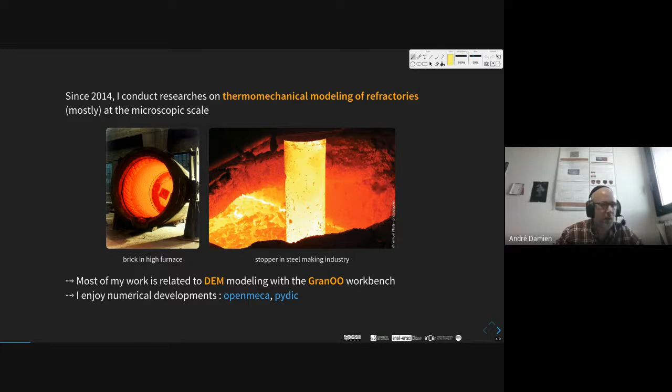So myself, I am inside this fourth axis. Since this date, I conduct mainly research on thermomechanical modeling of refractories. Here you have some nice pictures of refractories which are submitted to very high temperature. Most of my work is related to discrete element modeling with a software named GranOO.

And I also enjoy numerical developments such as OpenMeca and PyDIC. These are other software that I enjoy developing. Okay, so now let's move on.

I would like to introduce the discrete element method. I know there are some people who are very familiar with this method, but maybe not all of us, so I will very briefly introduce it.

The discrete element method was made for simulating granular media. Here you have some nice pictures of granular media such as rocks, but there is also cornflakes or other kinds of granular material, sand, and powder. As you can see, granular materials are everywhere and at every scale.

Okay, so now how do we consider this granular media? As you can see, in some cases granular media has the behavior of a solid, because we can walk on the sand, we can make nice sculptures with sand, but it also has the behavior of a liquid, because the sand can flow.

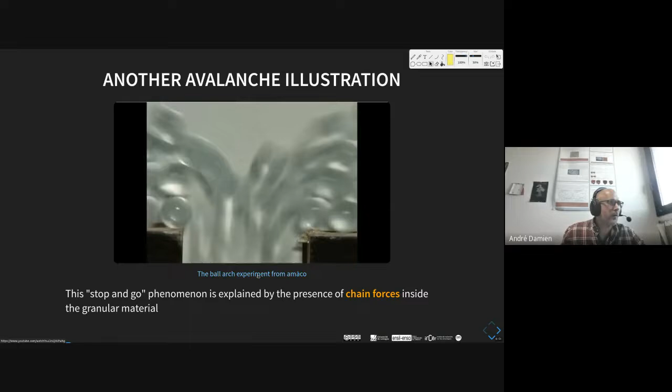Okay, so now this is the end of the experiment. I would like to show you a very nice video made by some colleagues of Duke University. This is a granular media, cylindrical. This is a disc, not balls.

And as you can see, this light is the chain force, which is revealed by photoelasticity. And here, this is a ball, which we can see. The ball, we will pull out,

and we will see a modification in the chain force. I think it's a very nice experiment. Here, as you can see, there is a modification in the chain force, and it's obvious to say that these chain forces are not continuous. This is not like pressure or stress.

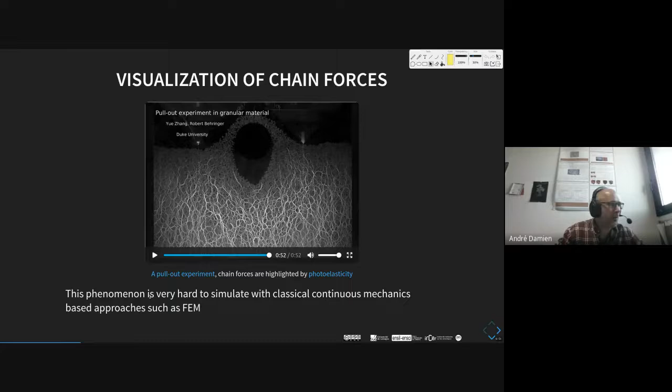So this phenomenon, this chain force, is very hard to simulate with classical continuous mechanics based approaches such as FEM. That's why the DEM was initiated at the beginning of the 80s in order to simulate the granular media. Here I think you get a citation of the main idea of DEM.

Cundall says, in this very important paper for the DEM community, that a granular medium is composed of distinct particles which displace independently from one another and interact only at contact points, and the discrete character of the medium results in a complex behavior under conditions of loading and unloading, and to date, no satisfactory constitutive relationships have been established.

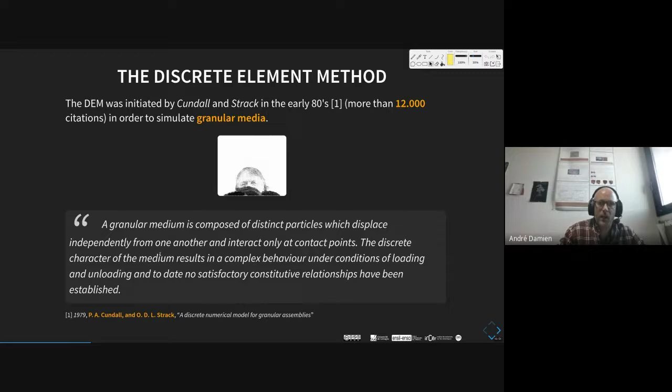So the main idea of DEM is to work, in fact, at the scale of the grain or the particle. Okay, so just a few words about how it works. So here you get some simulation of the DEM method.

So here you have some grains, and the grains are shaken inside a moving parallelepiped, and it allows us to create some waves inside this granular media. So the idea of the discrete element method is very simple. We consider that a discrete element is a rigid body, which we call a grain, and discrete elements are in interaction through simply contacts, and force displacement laws are introduced in this contact law.

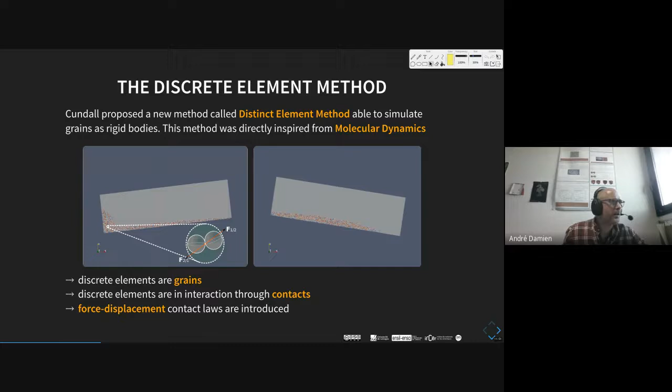And something very important: this method was directly inspired from molecular dynamics, in fact. So here you have the main algorithm of the discrete element method.

So at the beginning, this is an iterative method which needs very small time steps, and of course you get the initial state. So at the initial state, we consider the position of all the grains, the initial velocity, initial acceleration, and so on.

The first step is to collect all the forces and torques that act on the grains or discrete elements. After that, we apply Newton's second law to deduce, in fact, the acceleration from the forces and torques that act on the discrete element.

After this step, we have to integrate acceleration. So a first integration to deduce the velocity at the next step, and a second integration to deduce the position at the next step also.

And after that, we have to correct some displacement to apply, in fact, what we call the boundary conditions. For example, we want to have a rigid wall, so some grains have to be fixed, or we can apply a velocity, and some grains have to move in a given direction. This is what we call applied direction.

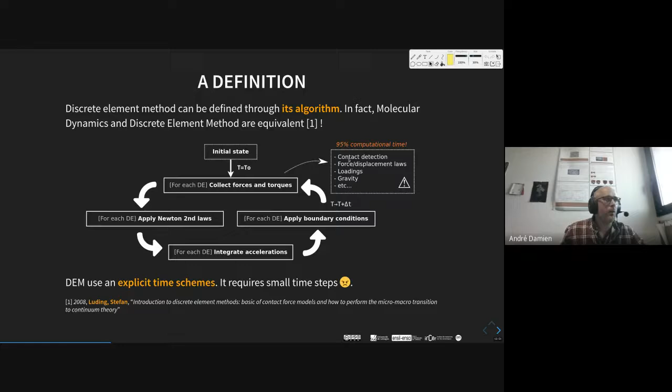So there is some trick to speed up this step, but at this time there is no satisfactory algorithm to get some increase in this contact detection algorithm. So now I would like to... here, this is a discrete element method to simulate granular media.

Now I would like to move on to another part, which is about using a discrete element method to simulate a quite continuum media, such as ceramics. The purpose of using discrete element method for ceramics is to model the failure of brittle media. Because as you know, using a finite element method to simulate fracture propagation and initiation inside a brittle media is not so obvious. So we can use the discrete element method to try to simulate this quite complex phenomena.

Here I have an example of an experiment called the wedge splitting test. You have a block of ceramics, a refractory, typical refractory, and the wedge is moving down to open up the sample and make a controlled fracture experiment. This is a method to measure the tenacity of ceramic material.

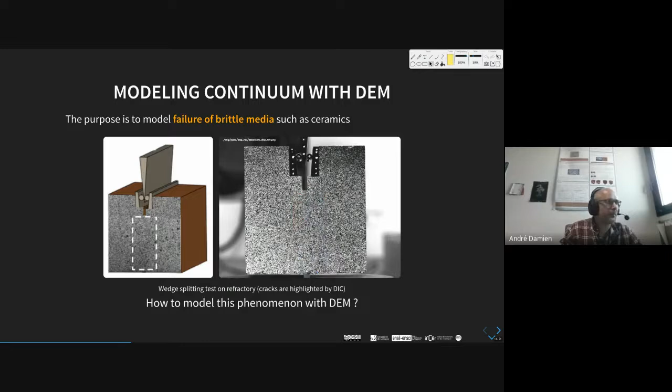So how to model this experiment with DEM? The idea is quite simple. It comes from the lattice element model, called LEM, which is a very old idea. We can combine LEM and DEM through the so-called bonded particle method. The idea is quite simple: we have material points which are surrounded by spheres. These are the discrete elements, which are mainly spherical, but we can use other geometry, as we will see.

These material points are linked through a very simple rheological mechanical model, and all these material points form a lattice network, as you can see on this picture. Here is the real experiment, and here is the model, the discrete element model, where you can see discrete elements linked by what we call bonds, which are rheological mechanical interactions between discrete elements. With this kind of trick, we can simulate a kind of continuous material with only a discrete description.

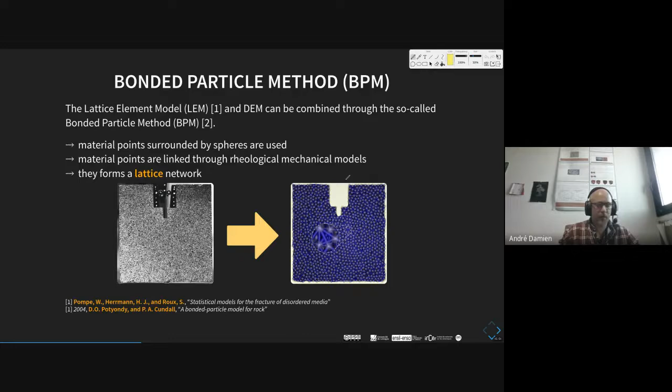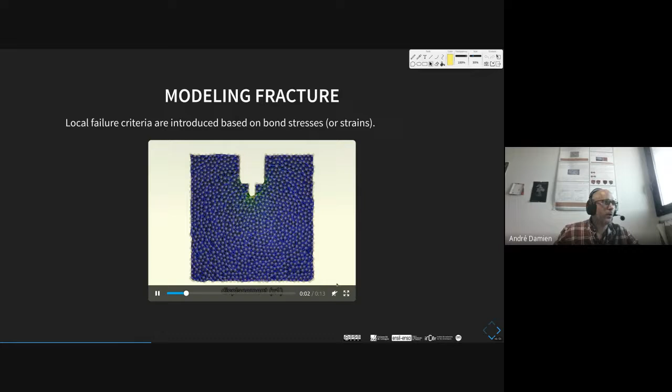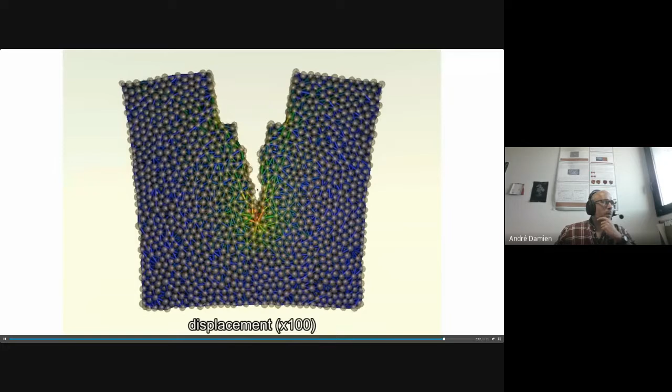The main interest is to introduce local fracture criteria inside this bond, and that is what we do in this video. Here you can see the propagation of fracture, and here the displacements are magnified. As you can see, we can obtain the initiation and propagation of fracture. These failure criteria are quite simple, generally based on local stresses, or less generally on strains.

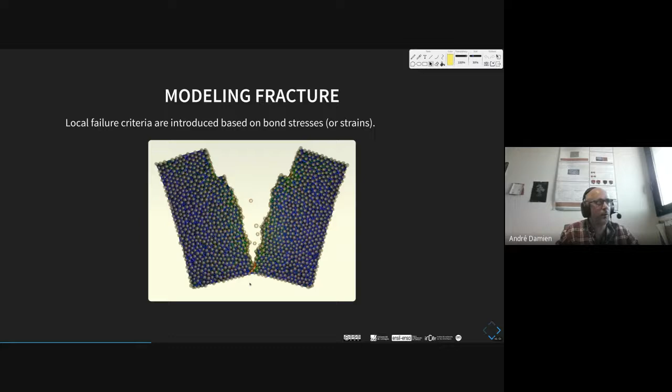But the main problem with this approach is what we have to put inside the local properties. The local properties for me are the properties of the discrete element and the bond between the discrete elements. So there is a problem: the input parameters of a DEM model are set at the local scale. For example, you set the mechanical property of this bond, but this mechanical property is not known. We don't know what we have to put inside this bond, and this is the main problem with the standard discrete element method for granular media.

We don't know what to put inside the contact law to get the right value of this contact law. We have to make some inverse problems, involve a lot of experiments, observe the experimental result, try some local properties, and make a kind of iteration to converge towards the right solution. So it's not so comfortable for users. This problem, I think, is a very common problem with DEM and the lattice element method.

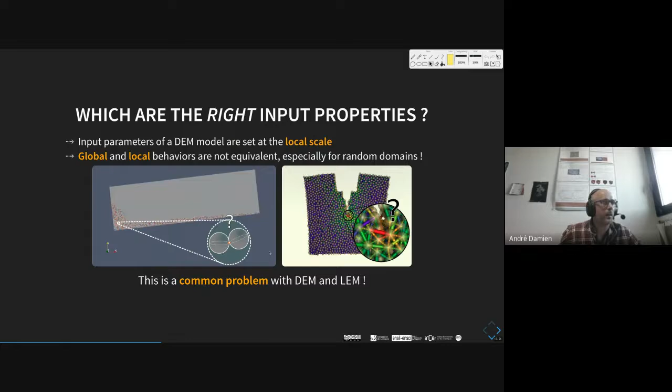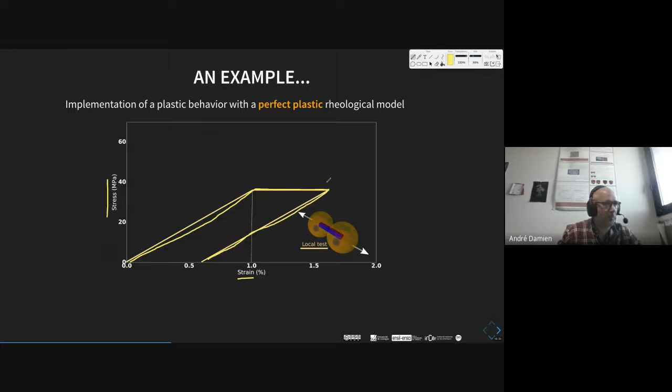So mainly discrete element users have to adjust their local properties to match given apparent properties of their numerical material. Okay, so I finish about this point.

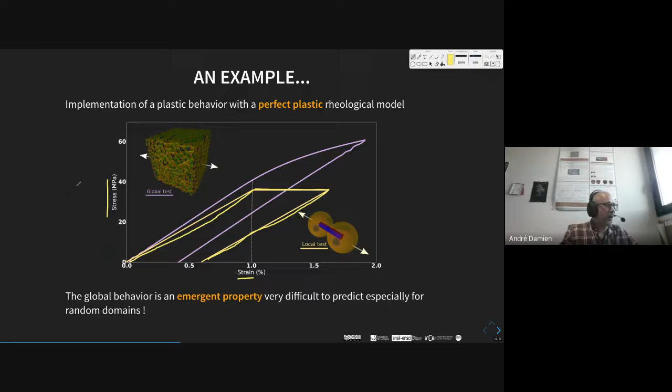Now we move on to the third part about the modeling of elastic behavior with what we call the distinct lattice spring model.

I will introduce this distinct lattice spring model. This model was proposed a while ago, and the idea is to have a direct model of brittle elastic media, defined only by three parameters: the Young's modulus, the Poisson's ratio, and a failure stress.

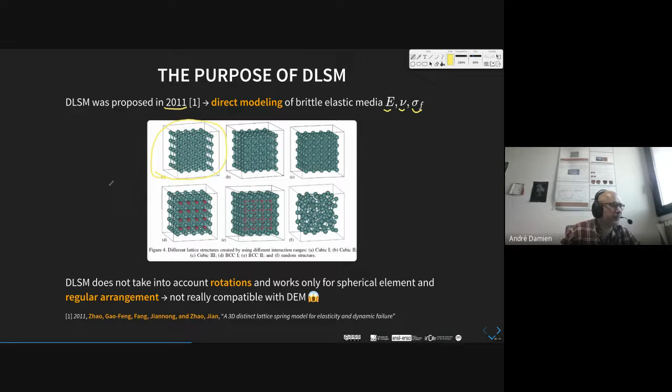So how does it work for the DLSM method? The first point is to apply a Voigt hypothesis, which is simply a hypothesis about the displacement fields. We consider that locally we have a linear displacement field, not quadratic - the simplest linear displacement field that we can describe mathematically.

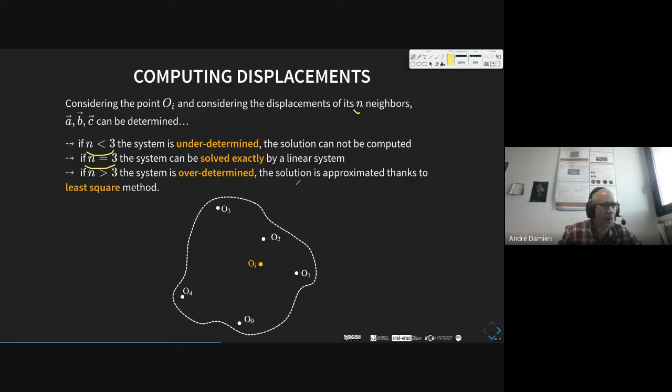We just apply the gradient on the displacement field. In most cases, with a discrete element method in 3D - not in 2D - the number of neighbors surrounding a central discrete element is more than 3. So all these unknowns A, B, C are approximated thanks to the moving least square method.

I insist on this term - it's 'moving' because we apply this method on all the discrete elements. So we have a kind of moving least square method over all the discrete domains.

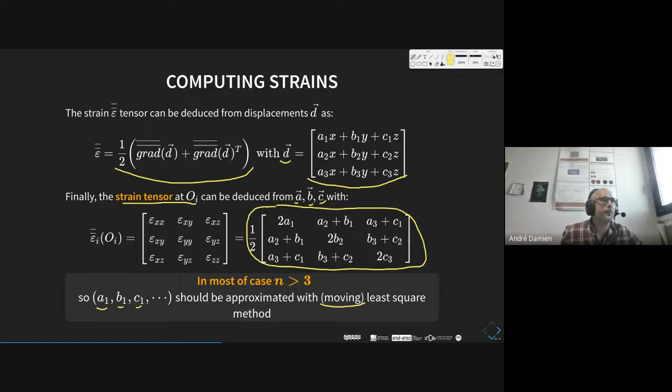Now we are able to compute the strains of a point cloud. Now we have to compute a reaction force to be compatible with the discrete element method, because inside the discrete element method, everything is forces and torques. There is no description of strain or stress. So how to do that?

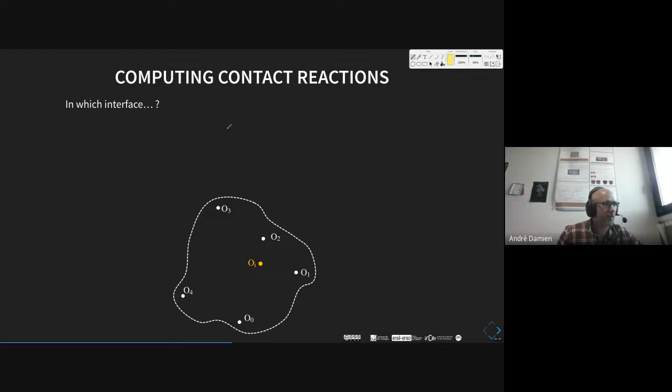The first thing is to make a kind of Voronoi tessellation inside our point cloud to get the surface interaction between two points. We can say that a Voronoi cell, in fact, is a discrete element. So we use a Voronoi tessellation.

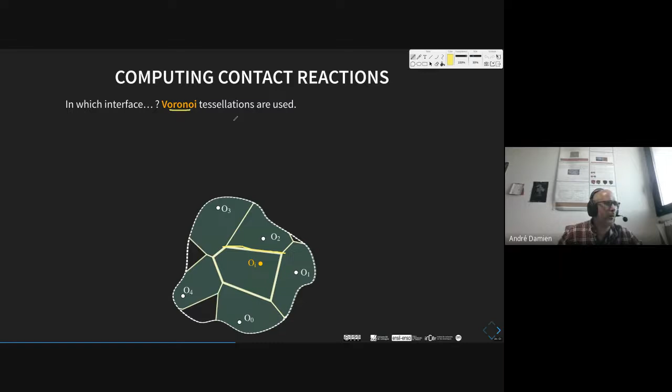Now, how to compute this stress tensor? It's quite simple - we just apply Hooke's law in 3D. As we are able to compute the strain tensor, it's quite obvious to compute the stress tensor, taking into account the Young's modulus and the Poisson's ratio of the material.

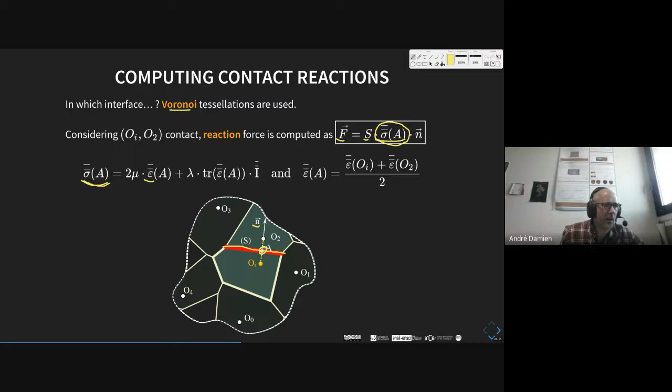A quite interesting and important trick: as we want to compute the force at the interface, we simply take the mean, the average value between the strains of the two neighbors to deduce the strain at the interface. I hope that's clear - sorry if it's not. So now we are able to have a stress tensor at the interface.

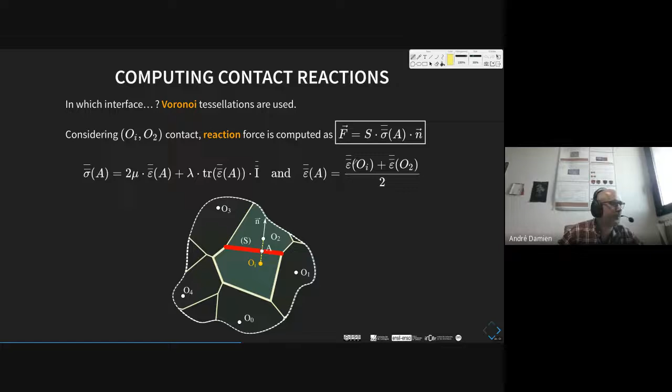So just a few words about how to build a discrete domain compatible with such an approach. So what we do in GranOO—there are, I think, a lot of things to manage this stuff.

We use what we call the compaction algorithm, named Cooker. This is a simple way to get a compact domain with spherical discrete elements. From this compacted domain, we apply a Voronoi tessellation thanks to the very simple and accurate Voro++ library. So now we are able to have Voronoi domains which are compatible with the DLSM method.

Okay, I would like to talk about some tests. We'll see how to introduce that. So to test the DLSM model...

I made this benchmark, which is simply an elastic ball, as you can see, rebounding and bouncing on an inclined plane. This very simple test is very challenging, in fact, because it involves high displacement of this ball, rigid body rotation, contact friction when there is a collision between the elastic ball and the perfect plane, and high deformations at the contact interface. So it's a very simple test, but quite challenging to obtain good qualitative results.

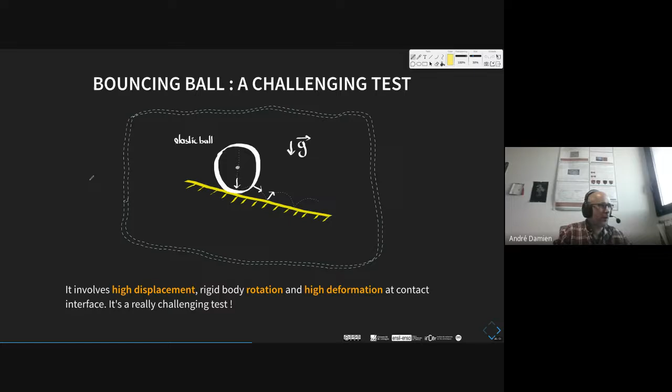So let's go see some video of this test. This is my first try, and as you can see, it's not very good. What we miss here—it doesn't work because the strains in this case are non-local.

What does that mean? It means it's important to compute the displacement field, the original displacement field, in the local frames of the discrete element. If we don't do that, of course, we are not able to manage high displacement and high rotation. So this is an important thing to do, and this feature was not present in the original DLSM method.

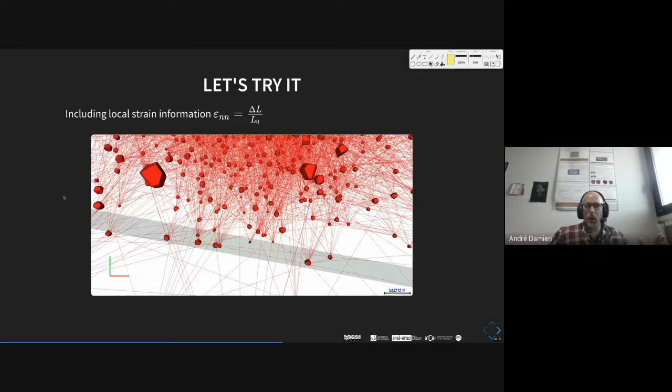So now we can have another try. And as you can see, it doesn't work as expected. So what we miss—in fact, the displacements are non-local.

Oh no, sorry. No, I made a mistake—I was too fast. No, the first thing is very important. In fact, here we compute the strain at the interface only by taking the mean between the two neighboring point clouds.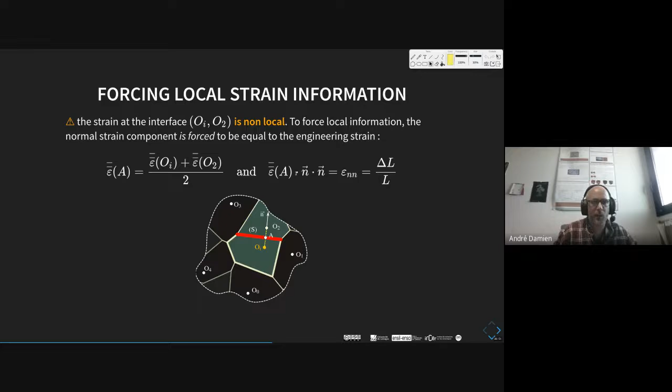And this is not really accurate, because in fact we can deduce directly from the displacement of these two points one component of this strain tensor. And if we force this component to equal this correct value, we are more accurate and more local, in fact. So that's what we do.

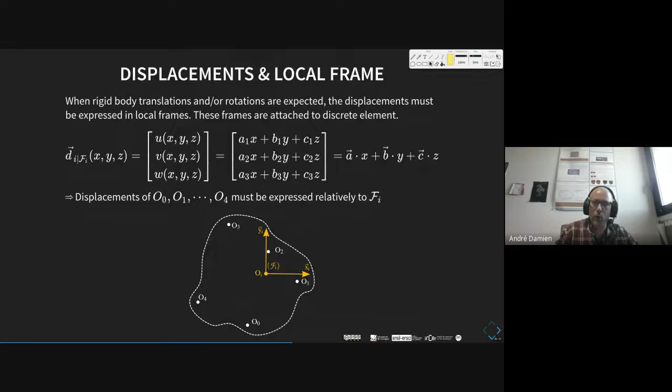Now the second thing is to use a local frame to have a local description of our displacement field. So this is the second trial. Now I move on to another try. It's quite better, but it still doesn't work.

So here's the explanation of this problem: with the original DLSM method, we have spheres, so with spheres there is no problem of rotation. But if we use polyhedra, which are Voronoi cells, it's a problem—we need to take into account this rotation.

So now we introduce the rotation capability in this method. Let's try again. So here again, it fails.

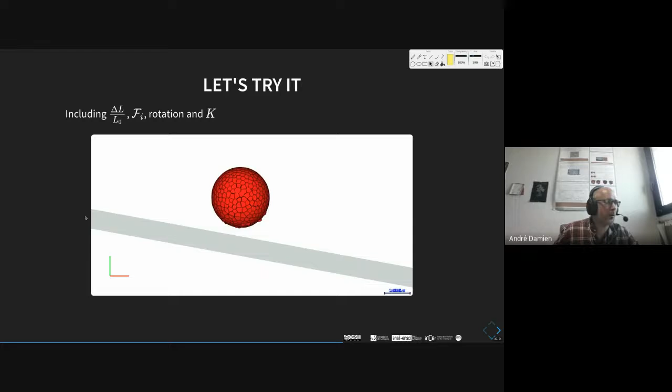So now another try. It started very good, but as you can see, there is again a problem. So we need, I think, a last ingredient, which is a small damping factor, because in fact this scheme is not strictly energy conservative.

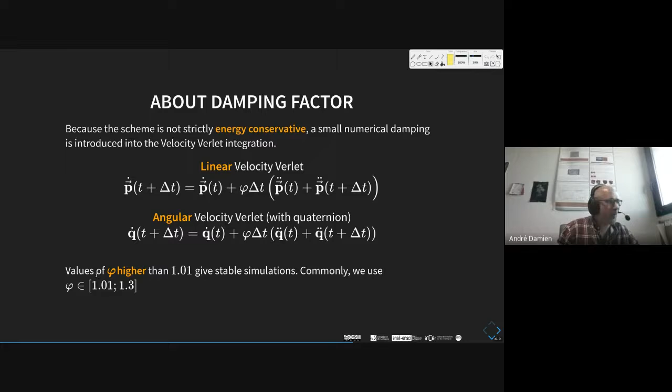I chose to introduce a small numerical damping factor in the velocity Verlet scheme. The initial velocity Verlet scheme is a centered integration scheme, so now this is a decentered integration scheme, and it introduces a very small numerical damping factor. It is now able to stabilize the simulation, as you can see here.

And here it works, I have to say.

I played the video just to the end. As you can see, it's a very simple test, but a very challenging one, because we need a lot of things to make this test work.

So just to conclude, to make it work, we need local deformation, local displacement, rotation and rotational rigidity, and a small damping factor. All these three features are quite new compared to the original DLSM method. I recall the main interest of this method is to introduce directly the material parameters of your simulation without making any calibration study.

So now I will talk about what I did during my stay at the CIMNE laboratory, which was to make a coupling between the GranOO software, where this method was implemented, and the Kratos multiphysics software. I will introduce that now.

This is an idea of Miguel Angel. He said if we are able to compute the local strain tensor, why not use the Kratos constitutive laws, which are able, in the finite element package, to compute stress. So let's try.

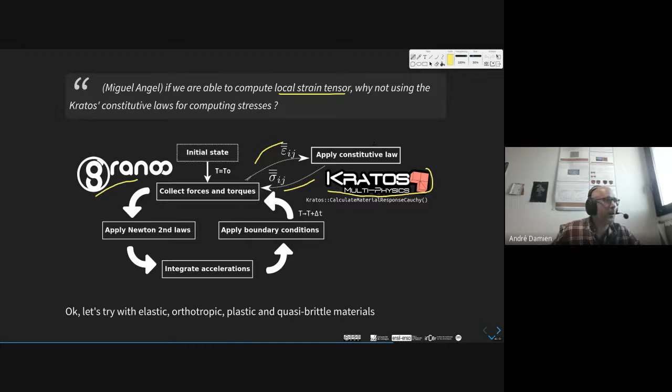Here you have the main discrete element algorithm, and here the dialogue between the Kratos package and the GranOO software. We simply send the strain tensor to Kratos multiphysics and apply these routines, the calculate material response Cauchy, and it gives a stress tensor. We treat the stress tensor inside the GranOO part to produce the right reaction force.

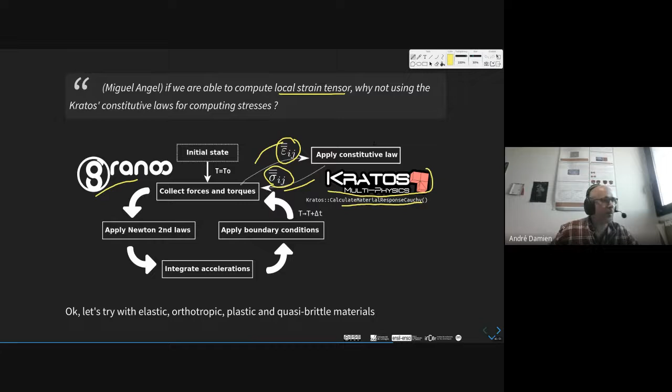And now I propose to show you some tests with this architecture - let's try with elastic, orthotropic, plastic, and quasi-brittle material.

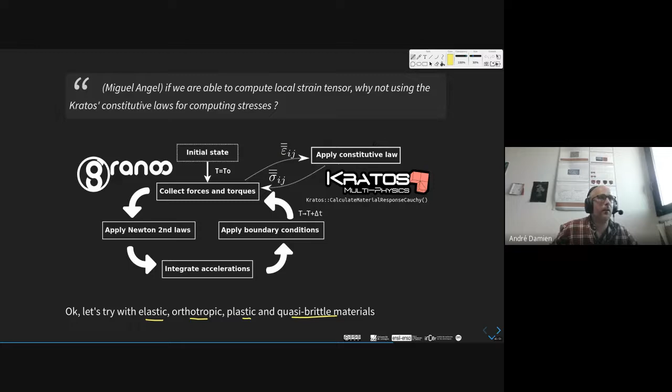The first test we do is a very simple uniaxial tensile test on what we call the gradiented mesh. Here you can see the mesh has a non-uniform distribution - it's smaller at the center of the sample. We would like to test this feature to know if this method is able to deal with different sizes of meshes, which is quite new to study.

Here, as input parameters, we put a Young's modulus of 5 gigapascal and a Poisson's ratio of 0.2, and we get at the apparent scale more or less the same value. So it's a very good result - I'm quite happy with it.

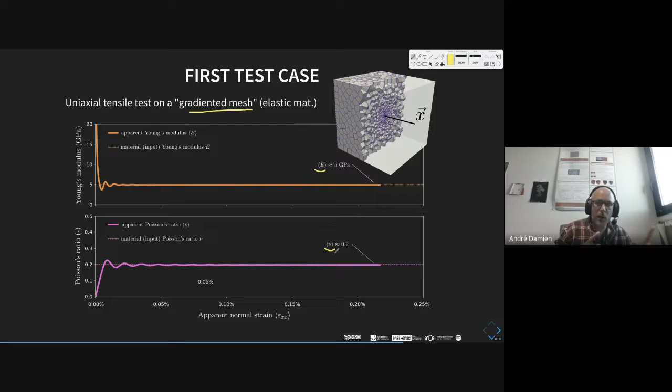So now the idea is to test something more complicated. Oh, sorry, I don't know why. Ah, okay.

This is a qualitative study. You have a plate with a central hole, and this is just a tensile test on this sample. As you can see, this is the stress - you get a stress concentration around the hole. Here is the analytical Kirsch solution, and here is our simulation. As you can see, it gives quite similar results, so it seems to be very accurate.

We get some main differences just near the hole, so maybe we are not very good just near the boundary condition, in fact the free boundary condition.

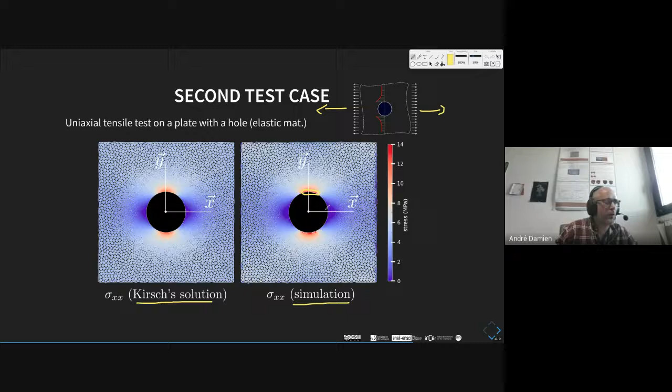Another test now is to test orthotropic elastic material. This is a very open problem with discrete element method - at this time, I don't see any satisfactory way to deal with orthotropic elastic material.

Here we simply use the generic anisotropic 3D laws of the Kratos package. As you can see, we put 5, 3, and 1 gigapascal for the Young's modulus on the x-axis, y-axis, and z-axis, and we get apparent values very close to what we put in as input parameters of our simulation. So it's a good result.

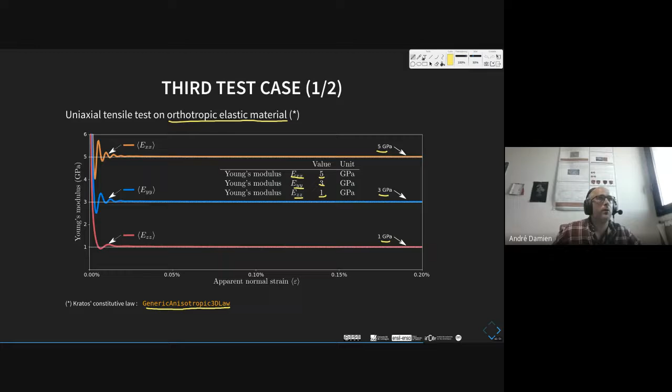We test the same thing with the Poisson's ratio. Here you have the input parameters of our simulation, and here you can see the apparent parameter. There is a small difference with the Poisson's ratio - to be honest, I don't know why at this stage. We have to maybe work on this topic.

As you can see, there's a small difference here, and of course this difference goes down when the value of the Poisson ratio goes down also. But proportionally, I think this is the same value. So it's not so bad with the Poisson ratio for orthotropic elastic material.

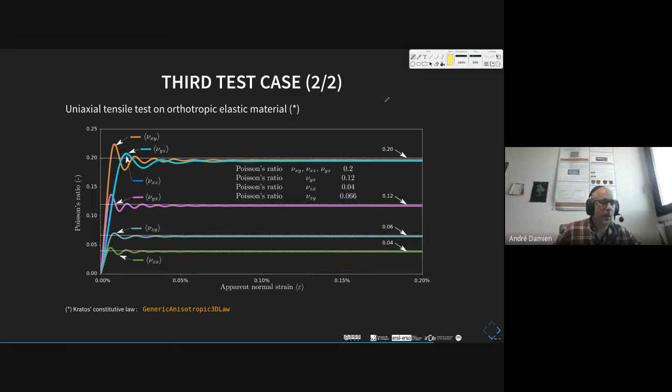Now, another test case is about plasticity. I'm not a specialist of plasticity, so I know that there are people who are very familiar with it. So I made a very simple test case.

So here we test this sample with 2,000 discrete elements, 5,000, 10,000, 15,000, and 20,000, just to test if the plasticity is sensitive to the mesh size. And as you can see, this is not the case.

So here we introduce a perfect plastic material with this Kratos constitutive law, and we get this apparent answer because this sample was simply submitted to tensile tests. So it's quite good results.

So again, here you get the input parameters. We introduce only yield strength, and we obtain this yield strength. So the results look good for me.

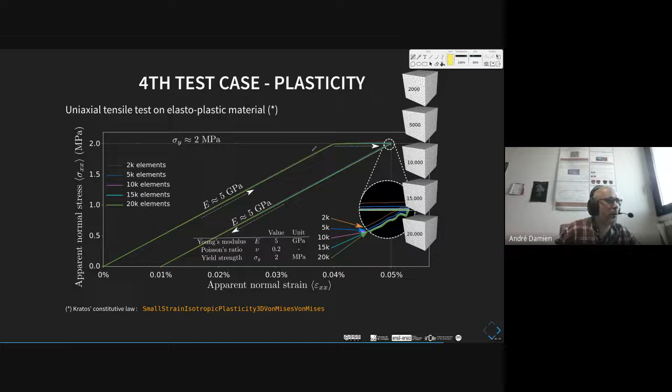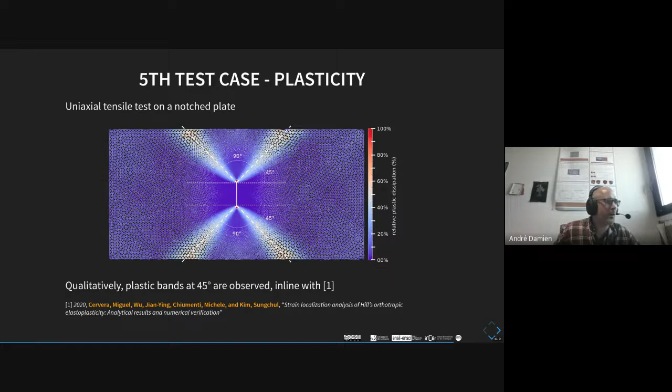Okay, so now just a qualitative test. So we do the same thing: we test the plasticity with a notched plate, and we get these plastic bands, which are oriented at 45 degrees. So it's quite in line with the theory.

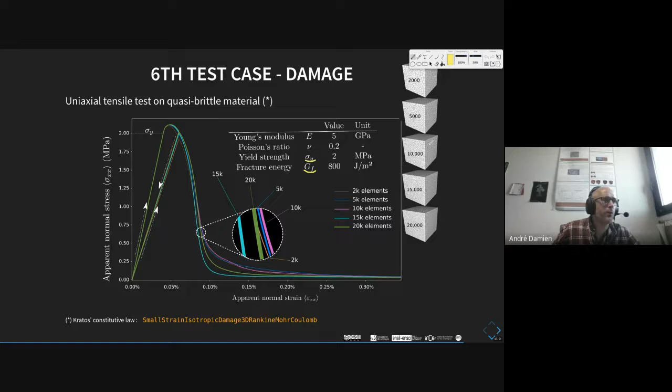And the last thing is about the quasi-brittle material. So we introduce damage modeling inside the material. We put a yield strength and a fracture energy, and we get an answer which is quite in line with what we would expect. Just the post-peak behavior is quite different. I don't know if it's significant or not, depending on the number of discrete elements inside our sample.

And we do one last test: a 3-point bending test, just to test if we get a crack path which goes to the right, toward this central point.

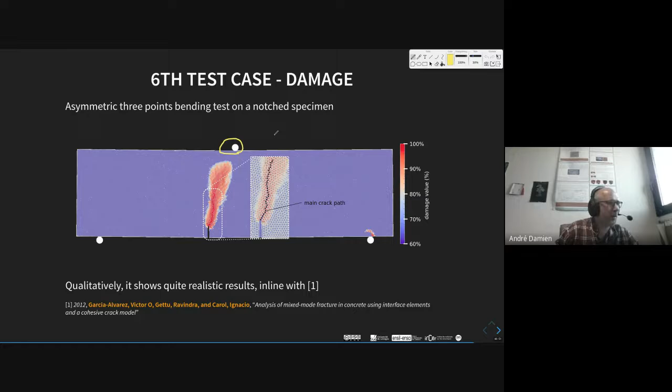Okay, so I think I have finished. So now the conclusion.

This study proposed an improved version of the DLSM model that takes into account rotation, proposes a numerical trick for stabilizing the numerical scheme, and the proposed model is able to deal with constitutive laws. We tested quasi-static and elastic material, plasticity, orthotropic material, and quasi-brittle material. It seems to support mesh refinement, and I think it's not very sensitive to mesh size, but now it's not so clear.

So I think now we have to try some more challenging tests with the coupling between Kratos and GranOO, and now I am ready for open questions. Thank you for your attention.

Thank you very much. Thank you very much, Andre. Very nice presentation. We have 5 minutes maybe or so for questions, if anybody is interested in asking.

Alejandro, yeah, go ahead, please. Hello, good morning. Congratulations for the good results. They're really good. I like them a lot.

Well, I'm one of the main developers of the constitutive laws that you've been using in Kratos, especially the orthotropic and plasticity damage ones. I remember Miguel Angel asked me at some point about this. Now I see the results. I'm happy to hear that they were useful.

Okay, it's not really a question, more like a comment. Do you have any complaints about the constitutive laws, or any feedback for me that might be useful to improve them? There's room for improvement, I just want a little bit of feedback, that's it.

To be honest, at the very beginning it was very hard to take in hand this new package, because I had no knowledge about how Kratos works. But now it's quite clear.

You mean maybe some bugs or something like that? Maybe you found some inconsistencies? If not, I'll be happy. No, sorry, I don't see anything strange for me. I made a lot of mistakes at the beginning, but that was my fault, in fact.

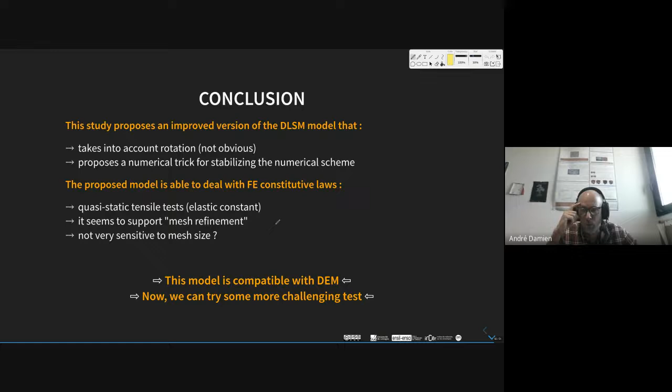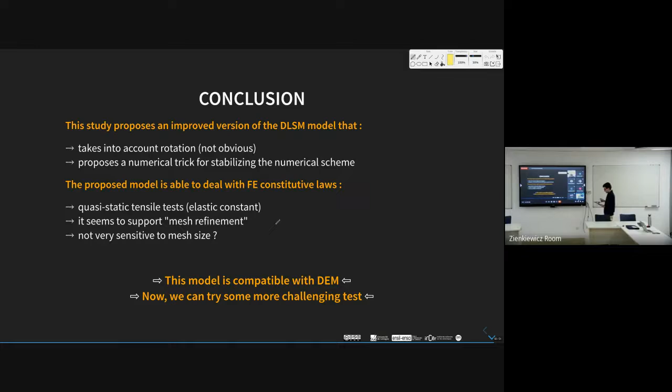Yeah, that should be fine, according to the size of the element, of the Voronoi element. That's a very good question and comment, Alejandro. I also had a question regarding this Voronoi size. I think the mesh dependency that may be seen in this example may be related to this internal length, this Voronoi size. Have you tried changing the Voronoi size to see if the mesh dependency vanishes or remains? How do you know which is the radius of interaction between one particle and the others, or the Voronoi size?

Yes, what is your question, Ignacy? Sorry, how do you determine the radius of interaction of one particle with the other? In the end it's the Voronoi size. How do you determine this size of the Voronoi cell?

This is mainly... at the beginning of the process to build the discrete domain, at this stage we know the distance between two discrete elements. So we get a kind of internal length. The internal length is determined by the size of the particles and the packing.

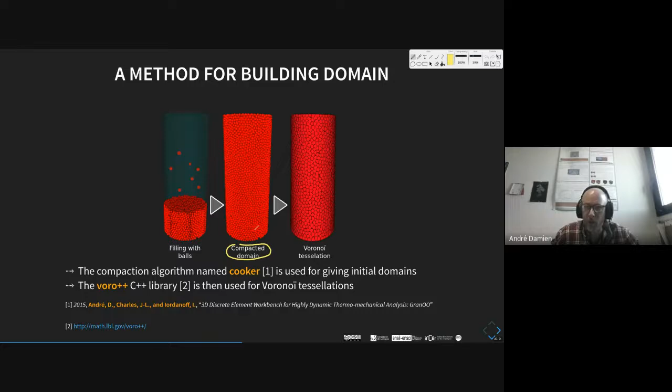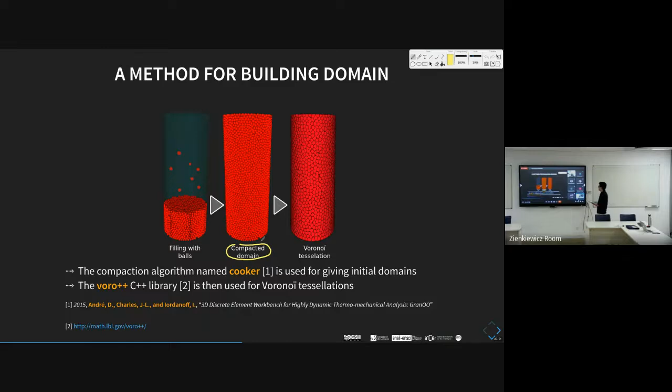Okay, because that's something important to check when you are using this method to estimate the force and displacement curve in a quasi-brittle failure test, right? I think this may have a relationship with that little mesh dependency. I'm guessing this is the goal, and it's something that may be concerning.

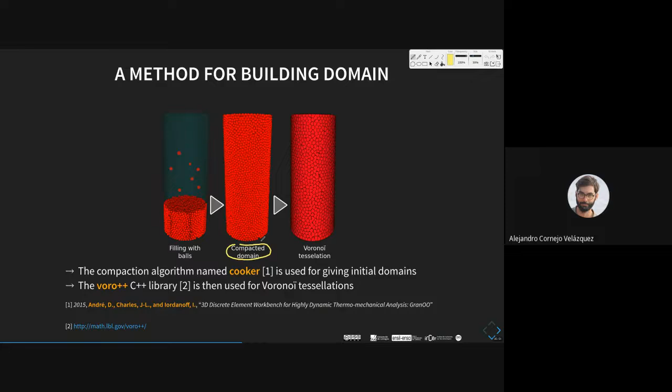Maybe it's what Ignacy says, that the estimation of this characteristic length... I don't know. I would expect the 20K elements to be the more ductile, for example. Yeah, me too. But there is no order, in fact.

I suggest, just out of curiosity, that you could try different internal length scales with the same number of elements. These 20K elements are Voronoi cells, yes. You mean the same discretization, but with twice and 10 times the size, right? Exactly, just to see what's the behavior, how the size effect looks. Just like a sensitivity analysis of the internal length.